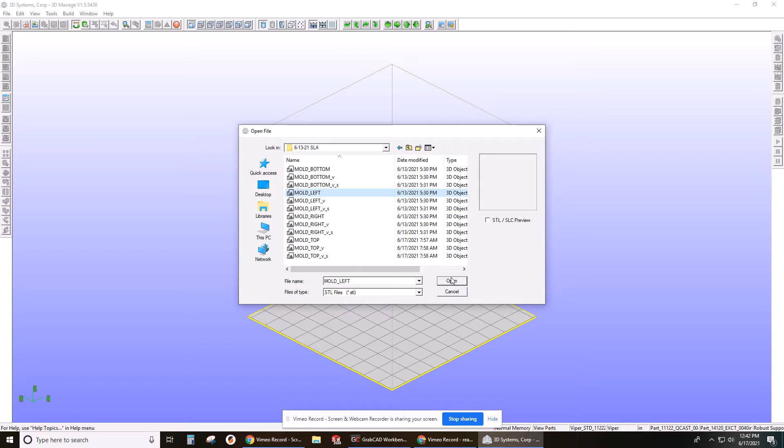Then you want to load your parts. So open up, go to the directory that you have your parts at, and we're going to load in one part. Open your part. It's going to load it on the platform. If the part comes in at different units, like millimeters or inches, you just select the part.

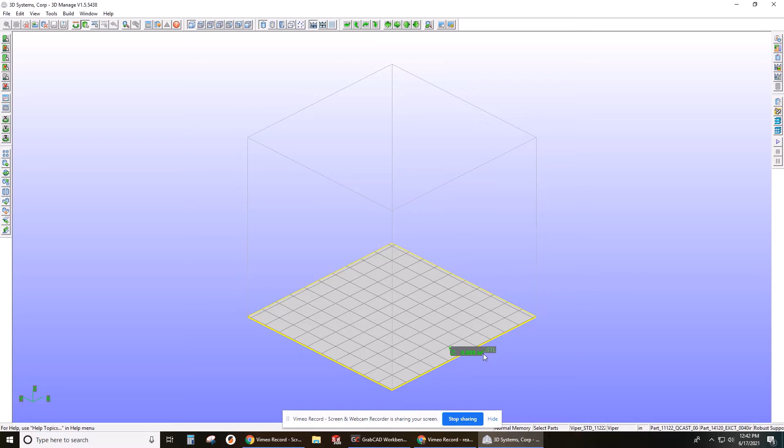And over here on the right, you can select millimeters to inches. And then if you want to go the other way, you can just select it that way.

Okay, so we've got the part set up. If you needed to rotate it, you've got your rotate options. If you need to move it, you've got your translate options, copy options, all right here.

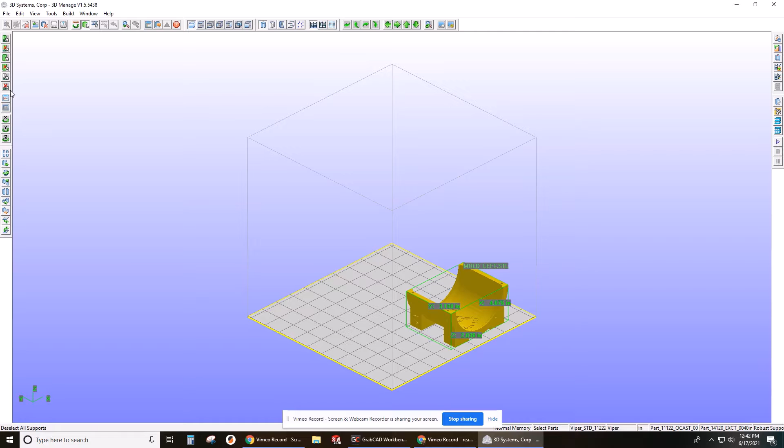And so once you have your part oriented in the way you want it, in this case, the important features that I want are on the inside and on the bottom here. Those aren't critical features.

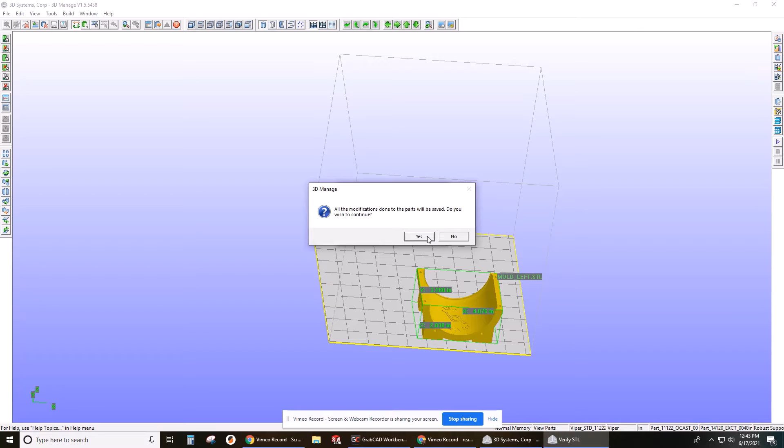So at this point, we'll go over to the verify. Click verify for all your parts. And then next, you'll auto place. If you have multiple parts, that'll arrange the parts for you.

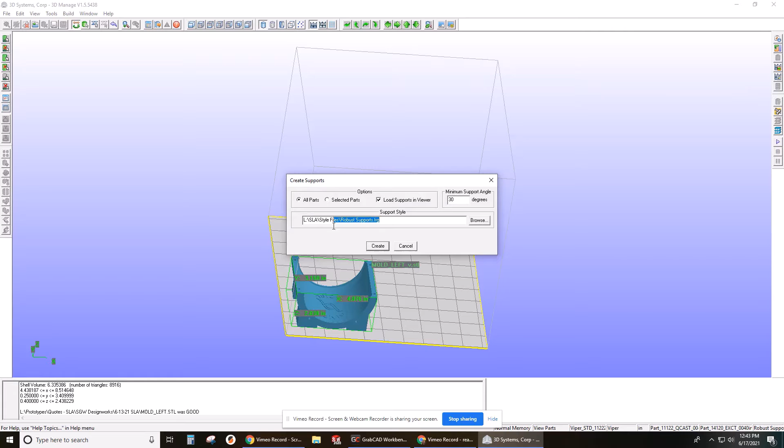And then we'll do create supports. It'll select robust supports, that's a preset we have. Select all parts, create.

On a side note, if you want to duplicate this part, what you would do is first you would orient it, create your supports, and then you'd copy it. So you'd hit your selection tool over here, select both the part and the supports, and then you'd go to copy, and you could select one and it would copy it in the X direction.

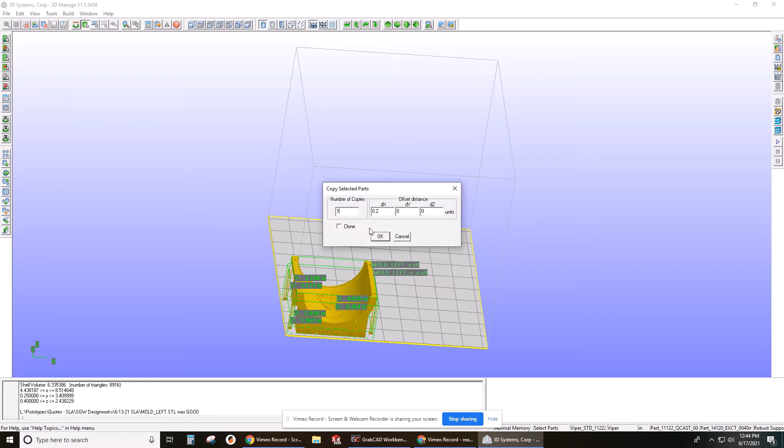Since we don't want that, we'll delete it.

Okay, so even though this part is set up in the corner here, when it actually goes on the slicer or onto the machine, it's going to put it in the middle. So you don't need to worry about putting it in the middle of the platform, it'll do that automatically.

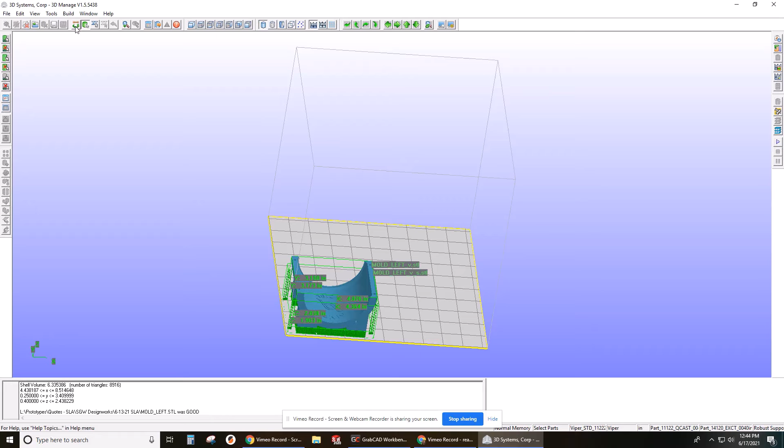So next step is if we wanted to edit the supports, we can change to our view tool here. And then you would select your part. To edit the supports, you have to actually select your part, then go edit supports, yes.

From here you can select your specific support, and you can select things like parameters to adjust density of your supports, and you can adjust things like strand spacing and line spacing.

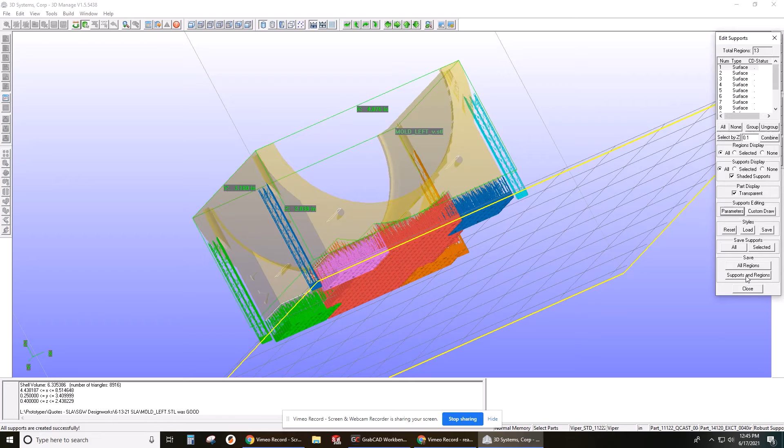So once you've done adjusting your supports, you can do save supports and regions, successful, and then you'll close out.

Typically you don't need to adjust your supports, they're already set up, but if you have a particular feature that you are concerned might fail in the print, you can reinforce it. So your supports are done.

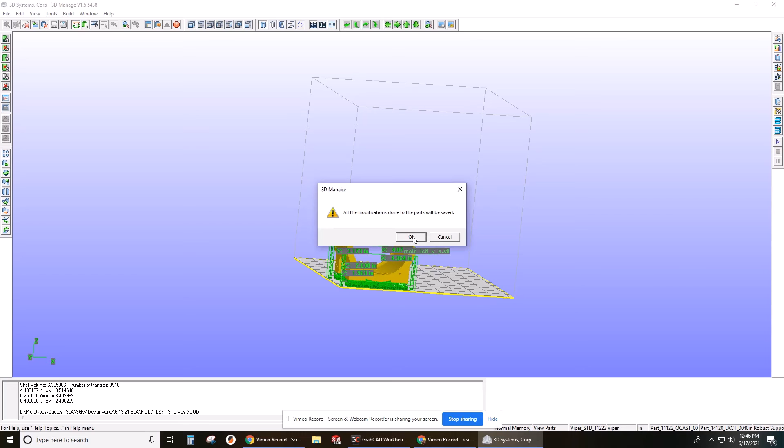Now we'll go over to prepare, and this will actually slice the part and prepare it to go over to the Viper SLA.

So you'll save it in the same directory as your original files are in, and it'll create a copy and put that on the thumb drive. So you don't need to save it to your thumb drive separately. So we'll just name it like SGW 61721.

So it's slicing all the layers, and it'll process all the parts and all the supports. Slicing successful. So now you're done with the 3D Manage part of it, and at this point you'll head over to the Viper SLA to continue the process.